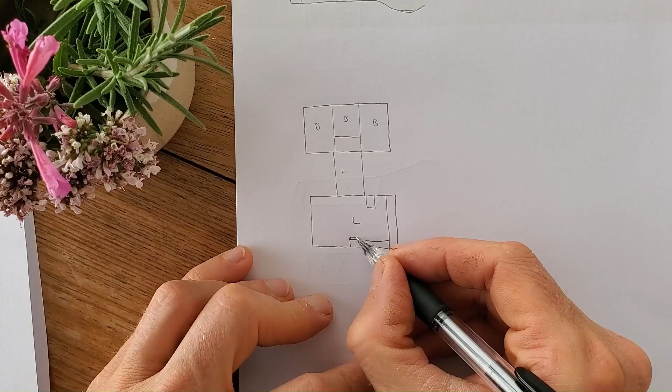The kitchen is on this wall, and the windows I set back to give them shade. This was a way of keeping within one simple roof shape while providing shade for all the windows. Here are large north windows that get plenty of sun, and these all have curtains over the top.

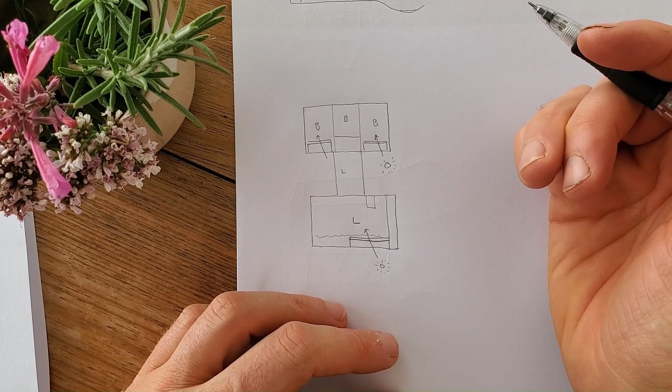The one thing you'll notice about the plan is it's quite compact. By being small, it uses less materials and it's less area to heat and cool. The walkway is essentially just the standing space of the laundry, doubling up on the use of that space.

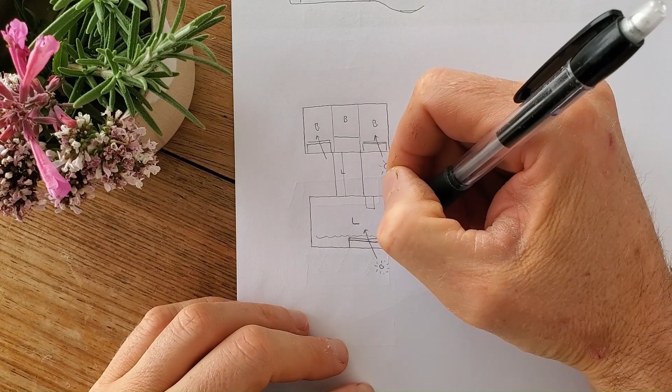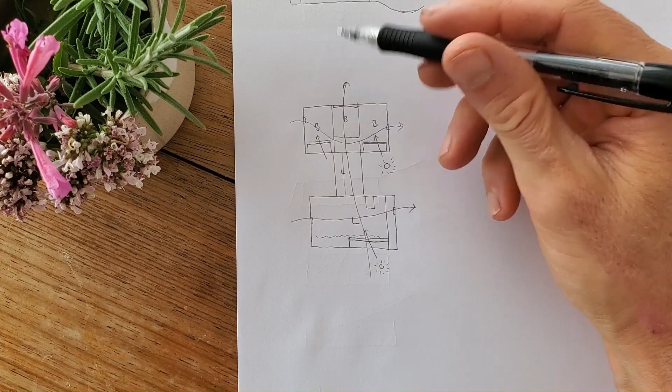The windows to the north are all large and openable, and there's also a large openable window in the bathroom, plus various other windows to the east and west. This provides very good airflow right through the house in all directions. At night you can open up the windows and doors, which all have fly screens, and purge all the heat out of the house, so it's cool for the next day.

Construction details. In section, the house has concrete blocks with a footing underneath. At some future stage I'm going to lay stone up the side of those. Here's the grass.

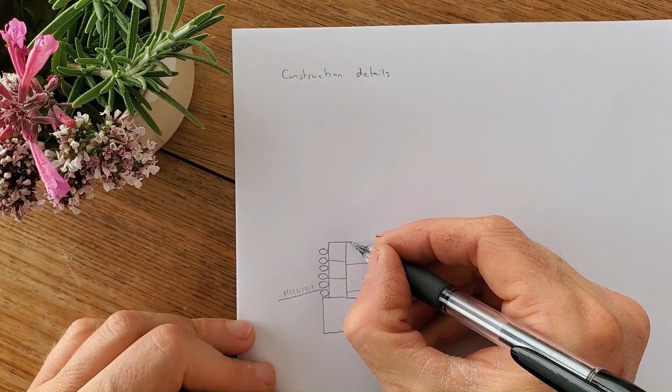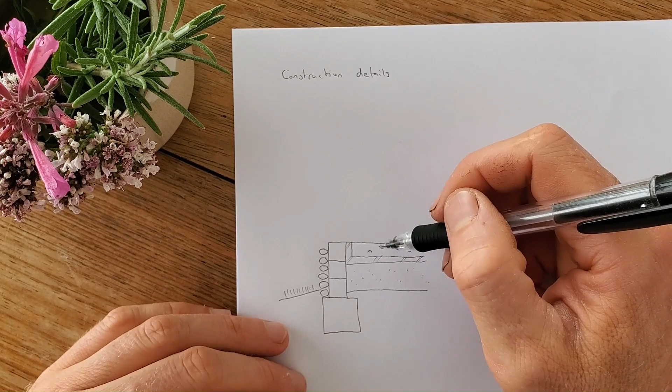Compacted sand in there, and then a layer of insulation all the way around, right along the bottom and up the side. That made a bathtub shape, which we could pour the concrete slab inside, which thermally isolates the slab, now thermal mass for the house. It's a burnished concrete slab, so it gets a darker colour, which is good for absorbing the sun's heat.

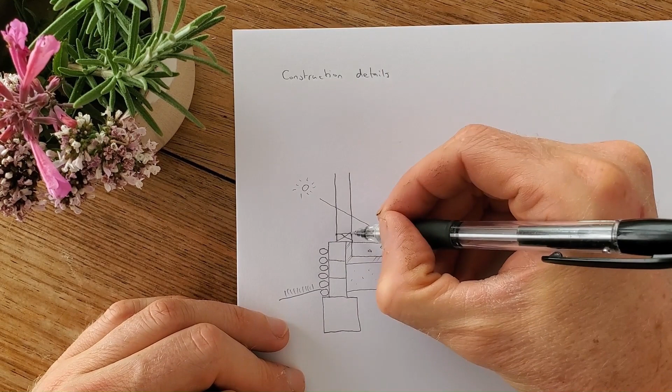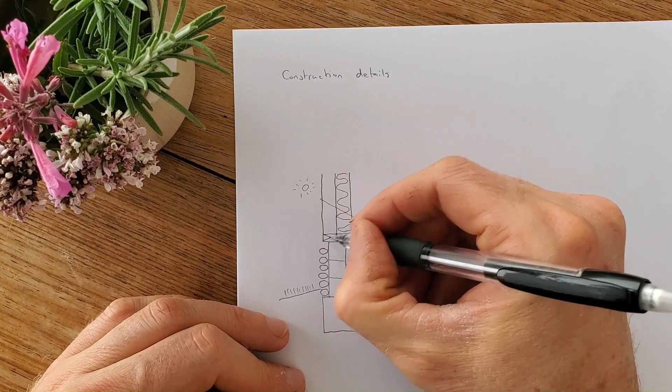Then the stud wall is in this position, so you can see there's no thermal bridge anywhere. The insulation goes all the way underneath the slab to the wall, up inside the framing, around, and then down again. We actually put another layer of framing outside that with more insulation, so there's double the thickness of insulation in the walls and ceiling, wrapping around the whole building.

Finishes. It's a very sparse palette. Internally there is recycled timber, and there's the concrete, a burnished concrete floor, with brass used as an inlay. The fixtures are also brass, and the paint is a lime wash paint on the walls.

Externally there's recycled galvanized iron and timber again, which is a rough sawn silver top ash. These materials were finished with natural oils. We used a Livos oil and also a hard wax oil. The hard wax oil went in wet areas and also on the kitchen bench.

I decided not to use melamine carcasses in the joinery, but instead used a film face ply. I did that for longevity and also because it's got an E0 emissions rating. The lime wash paint is also VOC free.